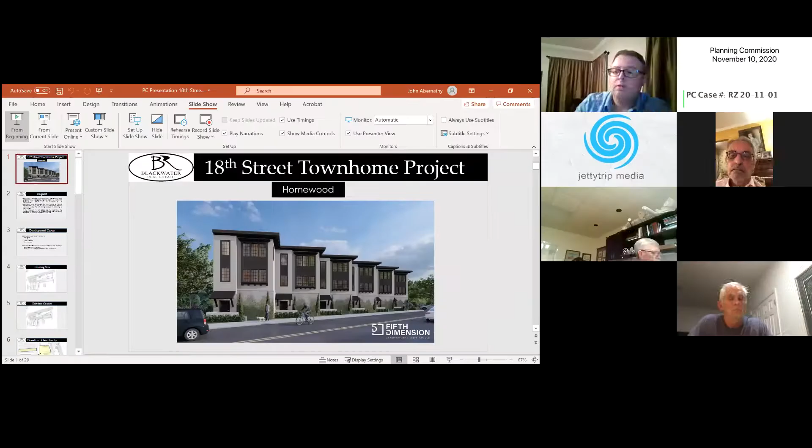This is John Abernathy, 303 Ascot Road in Homewood. I'm representing the applicant, which is Gold Nugget, and I'll give you a breakdown of who that is, but that's who I'm representing today as part of this project. So this is the townhome project on 18th Street. This is a preliminary elevation here, but I'll get into this more.

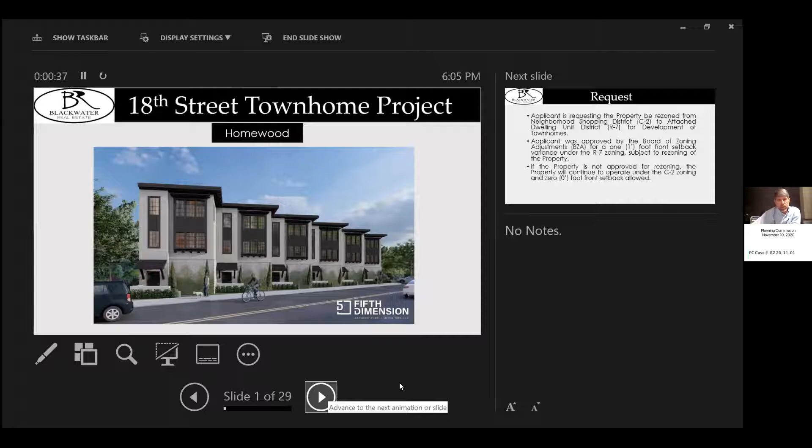So this I know was handed out to you, we have a few extra slides here. I think what was handed out was from the BZA hearing, so there's a few extra pieces in here, and I'll try to move through quickly because I know it's long and not read it to you, but just try to get our points across.

So the property is currently zoned C2. We're asking to go to R7 townhome district. We did go to the BZA and had to go twice. The first time we received 3 yes votes, but not 4, which we needed. So we came back and did the presentation you see here recently, last week, and got 5 yes votes. It was a 5-0 unanimous for a 1-foot setback. So this was subject to our rezoning, asking you for rezoning in the council to R7. And if it's not approved, then the property will stay with C2 zoning, which is a 0-foot setback.

So a lot of what's in here, not to bore you, but we got a lot of these questions after the first presentation to BZA. People wanted to know who I was, who our company was, what we've done, who the owner was. So a lot of what you see in here are questions that we received, not trying to bore you, just trying to give you the information that we've heard other people want to know.

So the owners are Gold Nugget LLC, which is 4 individuals: Dan Lovell, Mike Graham, Steve Graham, Benny LaRussa. Dan is on this call from the ownership side. And then we have an agreement together to develop this property. So we are the developer, Blackwater Real Estate, we're in Vestavia. And I have Philip McAfee, who's director of planning and construction, he's on this call too, in case there's something I cannot answer specifically that he may answer. So this would be the development group.

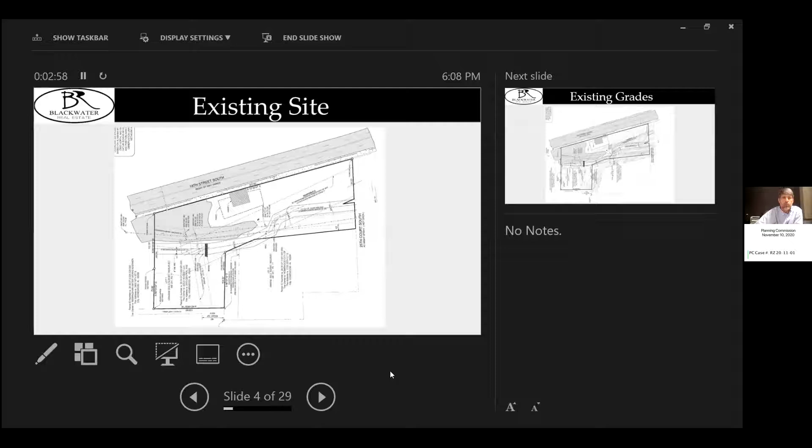This is the existing site. I wanted you to see the easements and some of the existing improvements on the site. This is hard to read, I know, but it shows the existing grades and the ditch that runs between there, and that ditch area is steep.

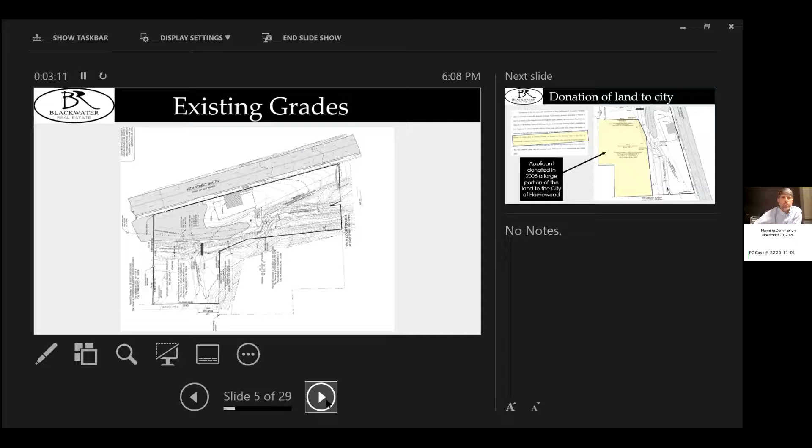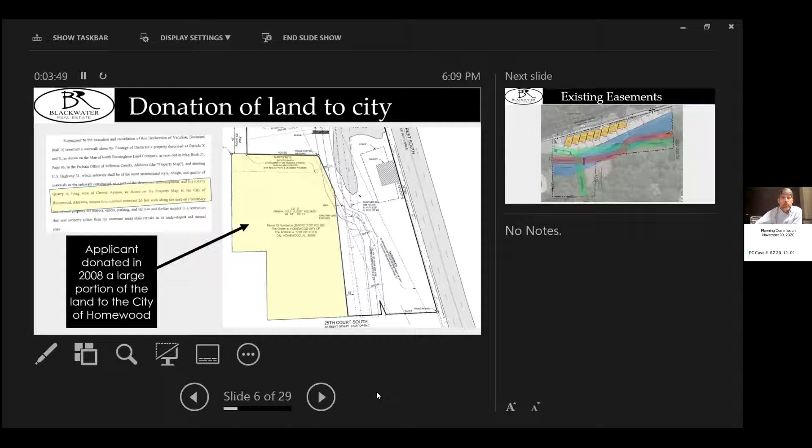One thing I wanted to point out: the ownership group in 2008 gave the yellow portion to the City of Homewood. There was a vacation of a couple of old road beds that were never built on the property, so they were vacated by the city. In exchange, this ownership group donated to the city this portion of the property, which is a hillside, primarily steep but wooded. I just want to call out the ownership group's generosity in doing this, and the additional buffer it provides from anything that might be behind us.

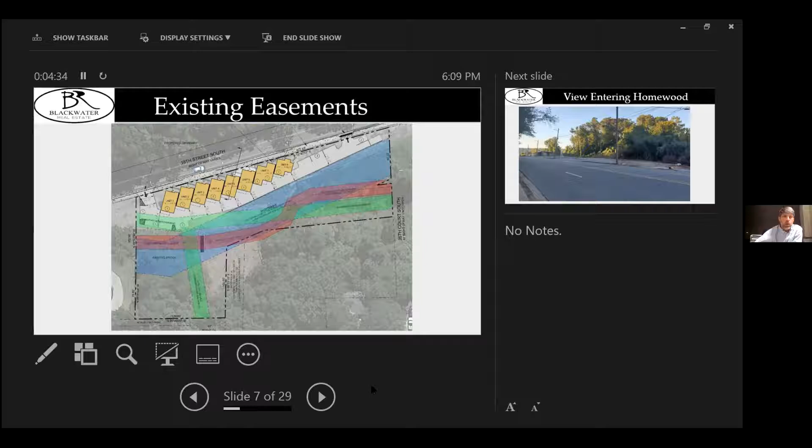This is to show some of the hardships we went through with the BZA, just to show why the developable area is so small. The green is sewer, red is storm, and blue is the Birmingham Waterworks Board easement. While we can in concept build over the green and maybe even the red, the blue we cannot disturb in any way at all — we have to stay off the blue area. That limits the depth of this property to a very thin 30 to 60 feet at most off 18th Street, which is why we went for the setback variance.

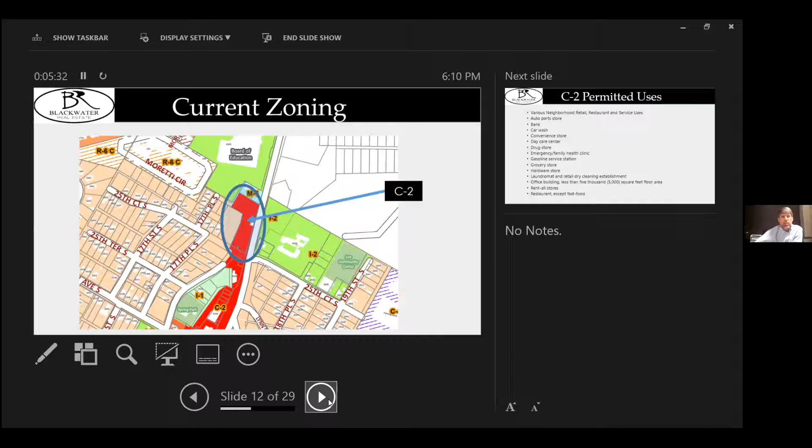The current zoning is C2, and I know you saw some stuff in the package about commercial, and you're probably wondering why we're showing you all this when we're asking for residential. But we were evaluating what we could do on it. So since it's zoned C2, we spent some time looking at what could be built, and thought it was important to show you the full picture. We're not saying if you don't approve us we're going to build these things, but whether it's us or someone else, these things could or would be built if that's all that's allowed on the property.

There are obviously some things like car washes and convenience stores and other uses that most people would say would be less attractive on the doorstep between Homewood and Birmingham. If you were trying to do an office retail use, this is kind of what would fit with the parking — 3,000 feet, or maybe 2,000 feet, two levels, 2,000 footprint. But that's about all you could do under the zoning and parking requirements.

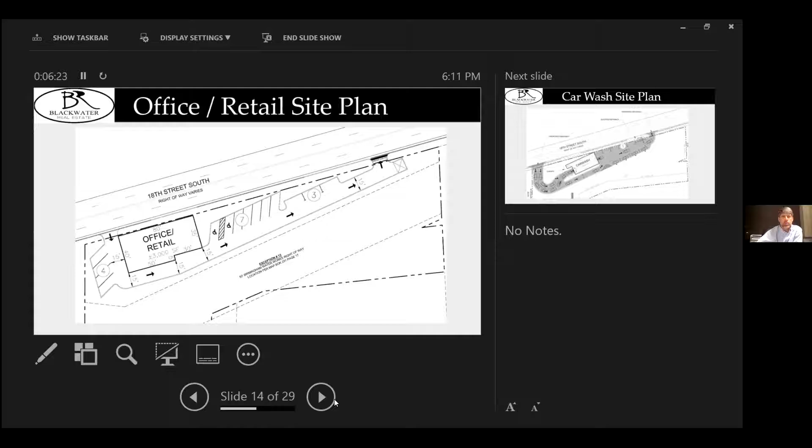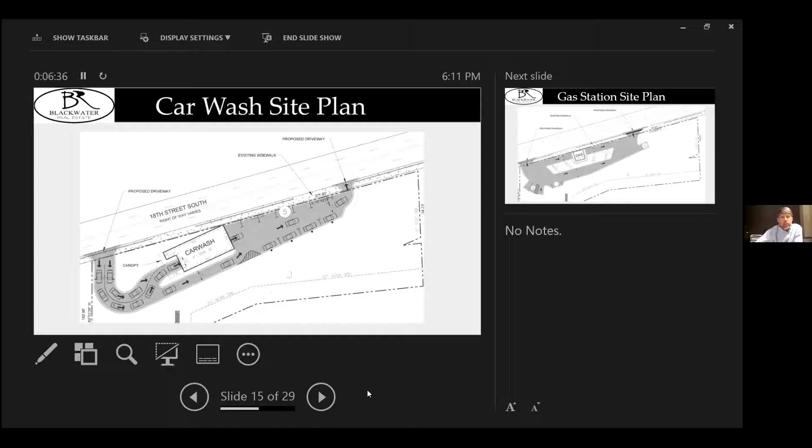We've had a car wash reach out — this is kind of one of those small car wash uses you'd go through, with a bypass lane, an in-and-out operation. This is kind of what a car wash might look like. And then, if you've seen in Mountain Brook, they have that small gas station — there's a small footprint gas station similar to what you could do on the property and still meet code.

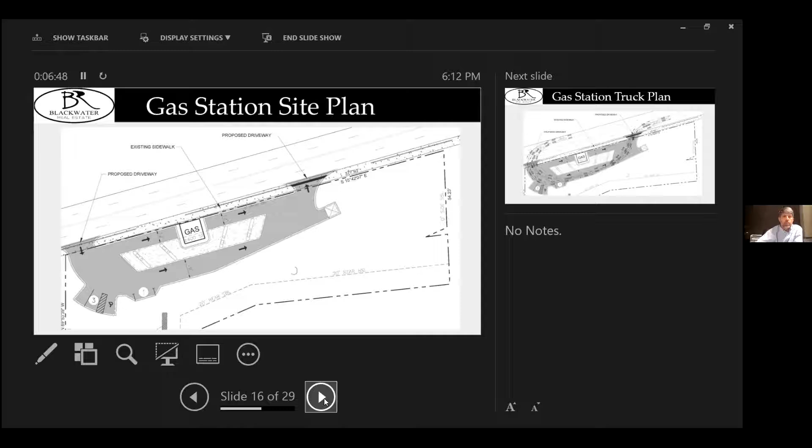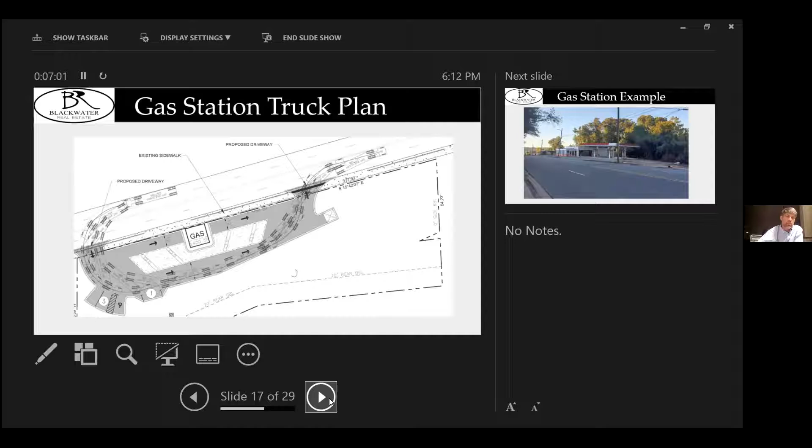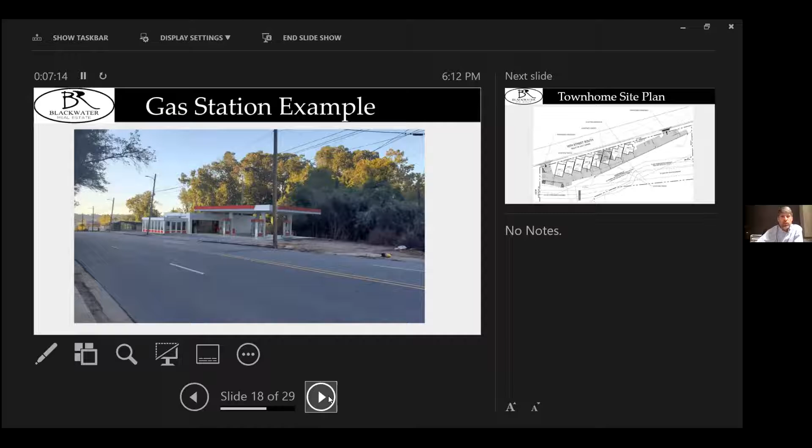Again, it has a zero-foot setback, but it would meet code. These are just things we looked at, not trying to do anything other than show you options. This is how a fuel truck would come in and out — just trying to look at what's available on the property. Again, I'm not trying to claim this is attractive; maybe it's just to convince you it's unattractive to have a gas station on that property.

So this is our plan that we're requesting under the zoning. What we would like to do is a townhome — an 8-unit townhome. They're angled because that's really all we could do to fit the garage and get someone in and out. That's how thin the property is; we had to angle it to fit it in.

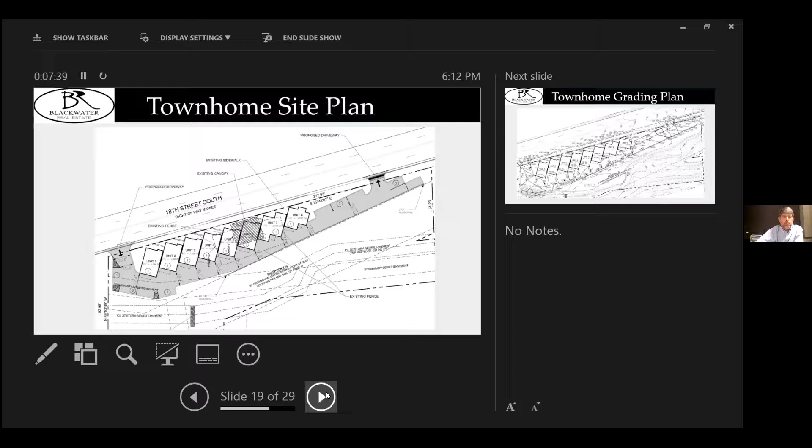Happy to answer any questions, but don't want to bog down in details if that's not something you want to talk about.

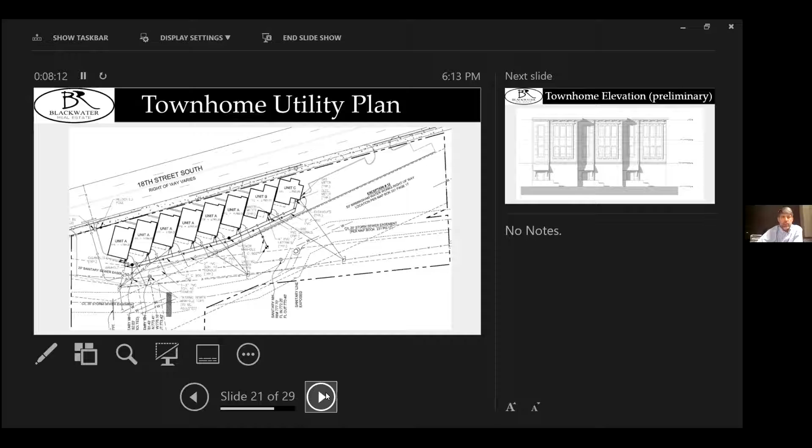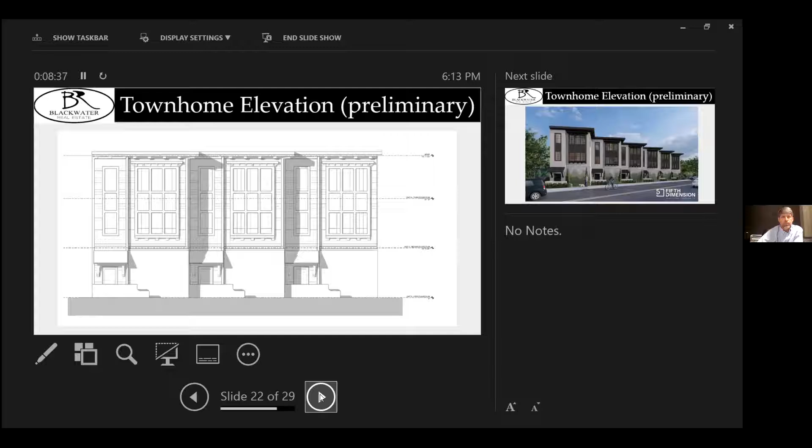This is that same elevation colored up. Again, it shows 6, but it would be 8. It shows some of our first looks. We thought about slope roof versus flat roof, we were thinking about all those things, but we haven't designed anything at this point. We were just trying to give you some perspective of what it could look like along the road with doors and screen walls, since we are going to be right up on 18th. I know different people may have different opinions about materials or looks, and we'll be spending time on that ourselves if we're able to get through this, but wanted to show you what, perspective-wise, it could look like.

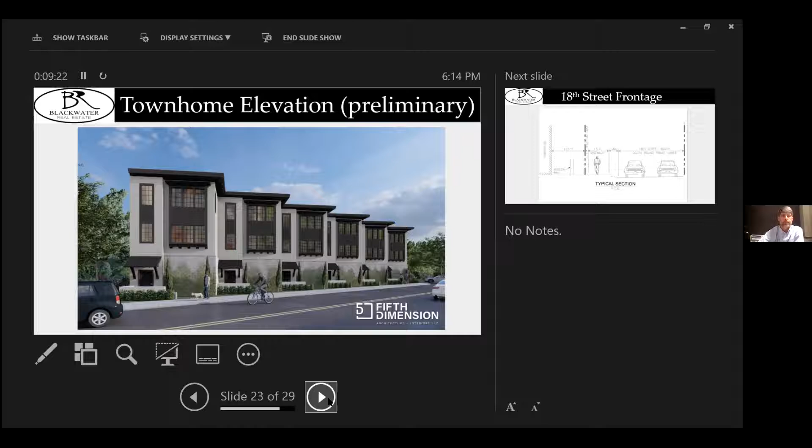We had some questions at the BZA, so I'll show this about the street frontage. This shows the southbound lane, double lanes of 18th, and then how the curb and gutter and sidewalk is, and then the right of way. This is a cut looking from the front door of the townhome through a screen wall to the right of way.

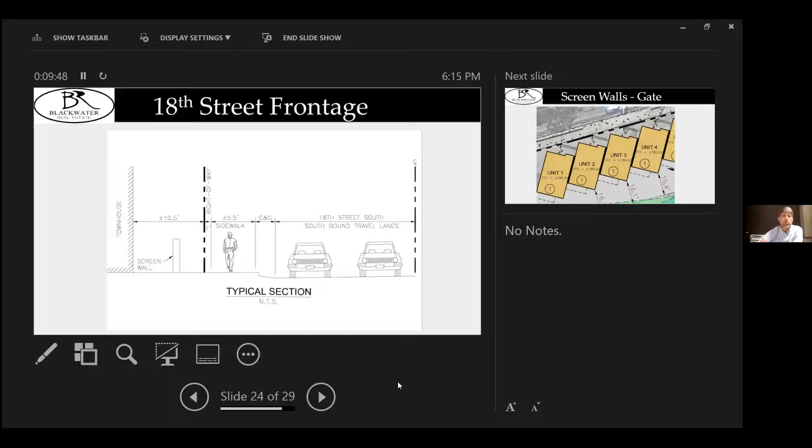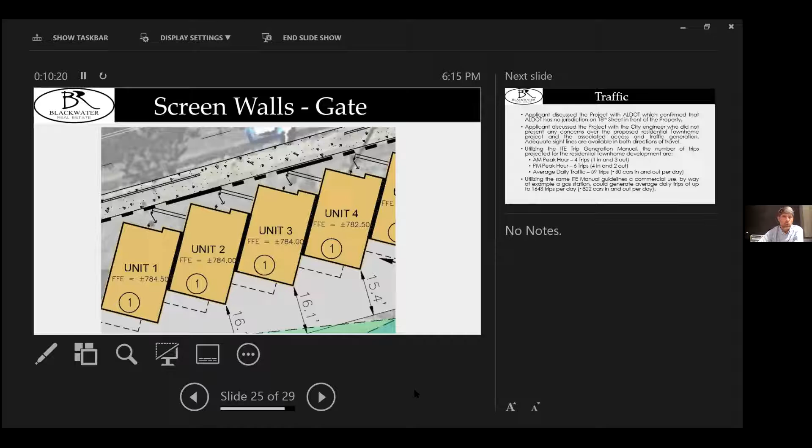There would be points to the townhome that would be closer, and you can see that in this next one, this corner here would be closer to the point, but that cut was from the front door walking out. There were some questions about the front door at the BZA, so we added some screen, a small gate to that screen wall, which we would probably have ended up doing anyway once we got into this further, but a small swing gate, which would help contain that area as well. And again, you have a 5.5-foot sidewalk outside of that property line closer to the road.

Traffic, we did have some questions on that. So bringing that to you, we did reach out to the DOT, and they confirmed no jurisdiction here. We did speak with Greg, the city engineer, and to date we have not received any questions or feedback from him that would say this is not a reasonable development, or that the roads could not handle this, or anything about sight distance or otherwise that he had concerns about. We did not hear those expressed to us. It felt like it was a feasible plan.

We took the trip generation manual that the traffic engineers use, put this project in, typed it in. This is an AM peak hour, 7 to 9 AM. It spits out 4 trips, 1 in, 3 out, as the max peak hour. Then the PM, coming home between 4 and 6, trips are 4 in, 2 out. That's the average daily traffic that would be projected, 59 trips, about 30 cars in and out each day on this development. By perspective, if you put in something like a gas station, you've got 822 cars versus 30 cars utilizing that property. So obviously a significant difference in traffic between the two zonings. We're down zoning, I guess, to a less intensive zoning than what's being requested.

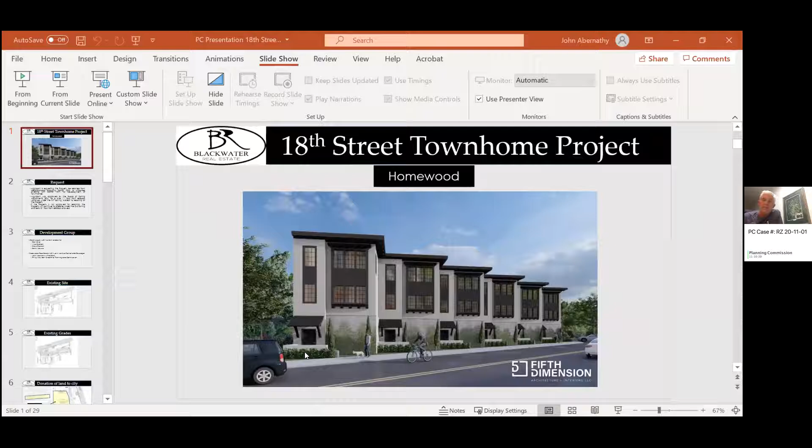Can I share? I'll pull it back up. Yeah. You know, that same question was brought up back when those apartments were built behind what was the old Board of Education. Correct, maybe that is still there. But those apartments that were built back there, there was still some discussion of could they join it. At that time this question was brought up, and I don't believe there was a physical way to do it due to the Birmingham Waterworks easement.

There wasn't a physical way to join it to 18th Street at all, to build the size road that you needed to. There was discussion back at that time. They did build—I think at that time we gave away an easement area that we had to build a walkway from those apartments onto 18th Street. The city gave that at that time, but that was the most we could do to connect those two areas.

Right, and I think what you can see here, hopefully addressing the question, is this rather large blue waterworks easement. You're only seeing the portion within the applicant's lot. However, if you look to what would be the southeastern corner, you see where the waterworks line comes through his property, which I believe is right along the line of the old 25th Court South road that would have been there. So likely what would happen is if anything would be available to be built from a city perspective, it would need to be approved by the waterworks, either a road and/or a sidewalk.

I'm not sure how restricted they are with even sidewalks disturbing land above their easement. I don't know if—can Vicky or Fred comment? Yeah, I mean, they're very, very prescriptive. We met with them, and I can just tell you what they told us, which is they'll allow nothing. They don't want somebody walking across it. That's their bridge, I believe, that's there. I'm not sure why they put that there. I think it was because they had people crossing, but they told us they would not even allow us to plant a tree.

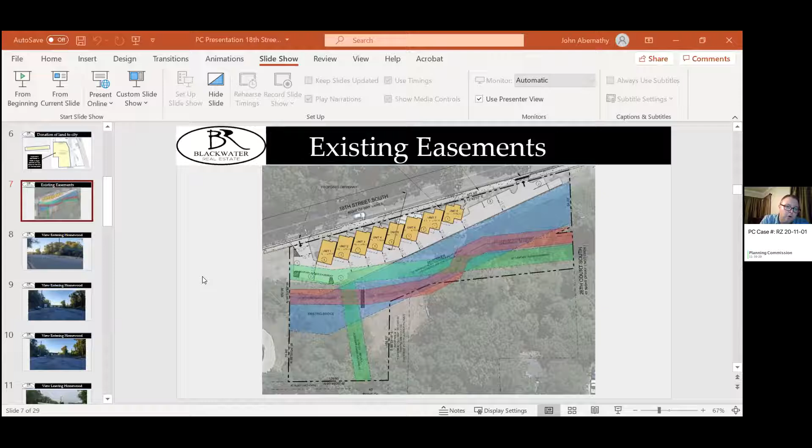Another point I'd like to make, and Mr. Lovell may be able to comment more on this, or Mr. Abernathy, is that when the land was donated—if you'll go up one slide, John—yes, thank you. Right, here, this was donated to the city. And as part of the donation, I believe the city took this, but it also creates a buffer to the neighborhoods behind there, which is significant. In addition, I believe part of this donation included a sidewalk improvement for anything that was developed across this.

Is that correct? So the sidewalks would tie back into what we're doing on 18th Street. Is that correct? That's correct. The agreement says that we will put a sidewalk and connect on both ends—even though it goes to the Birmingham, I guess, north—but we will connect to whatever is coming from the city up. Right, yes, great, it does. Okay, and thanks for confirming that.

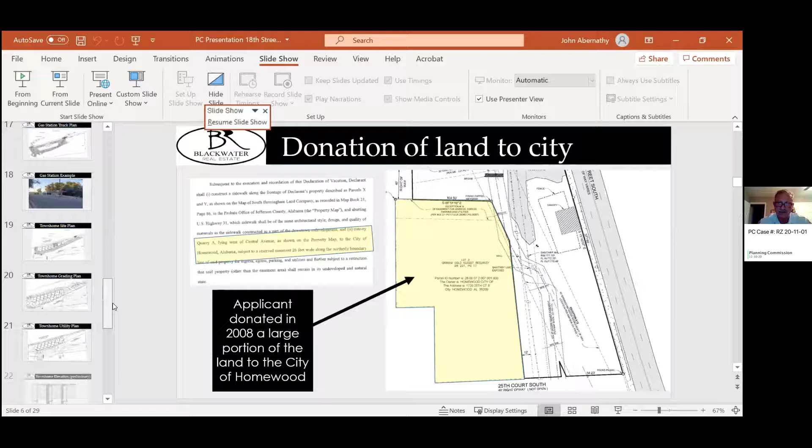I know the backside of these, there is not enough room to have a fire department access, so we have to have access to the middle. If there's 8 units, how wide are these units? Pull this back up. How wide are they?

Correct. It's going to be, I can't tell you exactly, probably about 30 feet. Okay, they're not very wide. Right, so if there's 8 units, if they average 30 feet, that puts us at about 240 feet total, 120 feet to the middle, front to back. If they're 30 feet, that's going to put us a little bit over the limit to have access to the back by just stretching a hose.

Plus, because of where the drive is, the fire truck's not going to be able to drive up to that point because it's really not wide enough for a fire truck, since a fire department access road is 20 feet wide. That being said, I think we can still work with it, but you may consider sprinkling these units, or making a small walkway from 18th Street somewhere in the middle and dividing some of these units, maybe between 4 and 5, so that we have fire department access to the back of the building.

I think sprinkler might be the best looking option, but that gives you a lot of leeway if you sprinkler them. We did discuss sprinkler, but it was a cost issue as well, and trying to keep everything down, just keep rental rates down. Sure, but we still got to meet the code no matter what.

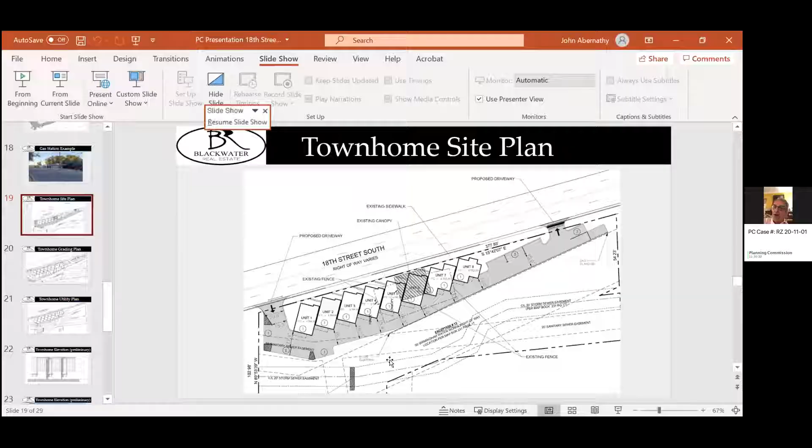Is there a motion from any commission members on this RZ 20-11-01? I make a motion to approve RZ 20-11-01. Okay, that is from Mr. John Cronteras. I second. That is a second from James Riddle. Fred, would you call a roll?

Chief Hill, Yes. Mr. Cronteras, Yes. Mr. Riddle, Yes. Mr. Roberts, Yes. Miss Andrus, Yes. Mr. Wilson, Yes. Mr. Woods, Yes. Mr. Foster, Yes. Your application is unanimously approved.

Thank you again for an excellent presentation. This looks great. I just want to second all the other commission members' comments on that, and looking forward to see it done and developed and finished. Thank you. I appreciate your time. Thank you. Thank you all.

All right, moving right along. We're going to go to, this is actually, I believe, items 2 and 3 are by the same presenter, Ms. Sellers. So if you would, and if there's no objection from the commission members by way of voice vote, I propose that items 2 and 3 be combined for presentation as they are part of the same project essentially. Any objections? Mr. Foster, I have no objection to presenting them. These are certainly adjacent properties. They are not a part of the same project. I just want to be clear that I've been hired by 2 separate clients to present this tonight, and they are adjacent properties. They would like to have the same zoning, so they're certainly in concert on that point. But one is looking at, well, I can go into the details in a moment, but they're not a part of the same project.